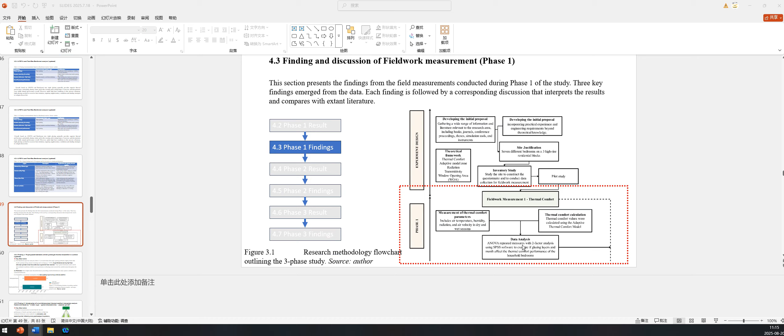From my findings, it shows some... exhibits the prolonged summer discomfort in summer. It shows the different discomfort - in summer, too much heat in summer.

Okay, okay, all right, okay. So this is okay, all right.

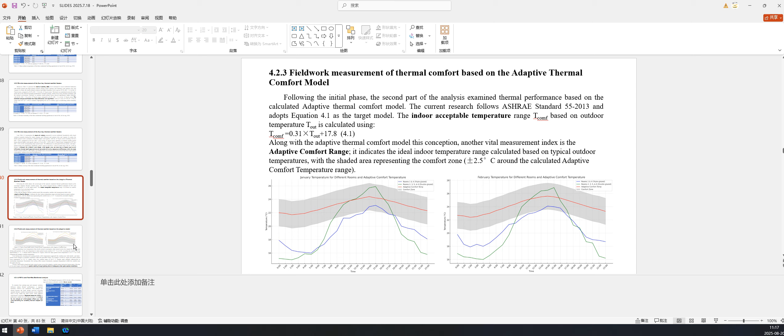Yeah, I have a graph, previously. So okay, all right, so what about just now? What is the difference between just now and this one? This one I want to highlight the discomfort and overheating, the time duration, exceeding the period and the time.

Can you show it in the same graph? The next one, the other graph... the other one. You mean this one? Yeah.

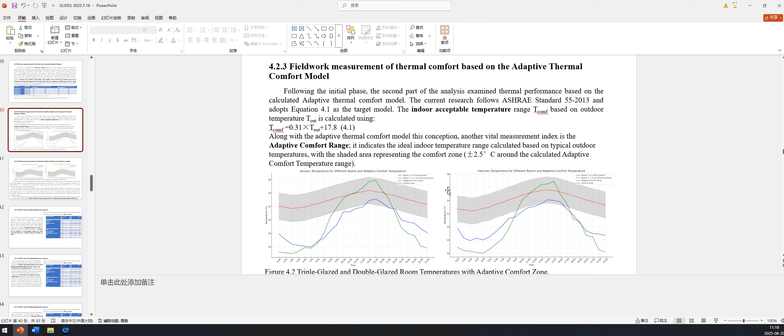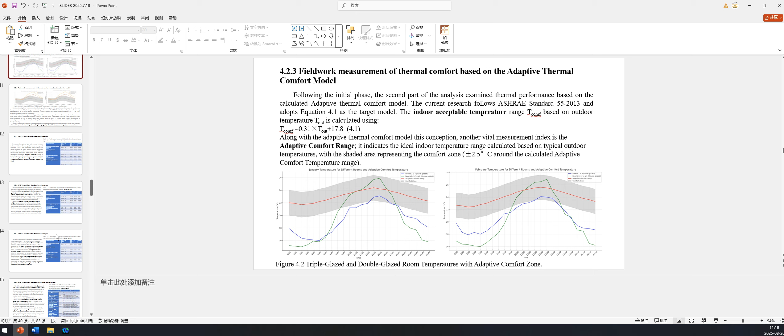Okay, if you show this one, I think this is enough. But it's okay, I understand you want to show the other one, but I'm not sure what kind of chart that is. It's not clear - the y-axis is something wrong.

No, it just shows two types of room. Maybe, yes, maybe. Because here it shows that all the time triple glazing will be higher than the double glazing, isn't it? The y-axis is two types of the glazing, not the temperature actually. I mean two types of the glazing.

So it's not clear, you see. If you compare it, it cannot be not temperature - it has to be some results, you see. What do you mean? When you put this together, you get an hourly chart here. So on the y-axis, there must be something you are counting, right? Do you get what I'm trying to say? So now I feel that it's not correct.

I mean, if you want to show this, probably the best way is to put two graphs together - the triple glazing and whatever is on the y-axis. But if you're just showing the hours, how best to show that? Because if you put this together, that means you are comparing. So what is to compare is actually the temperature.

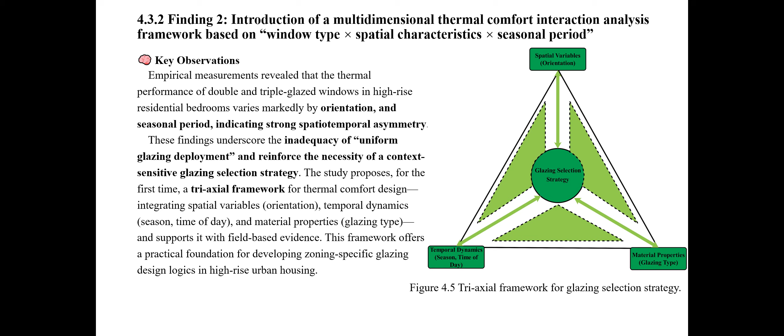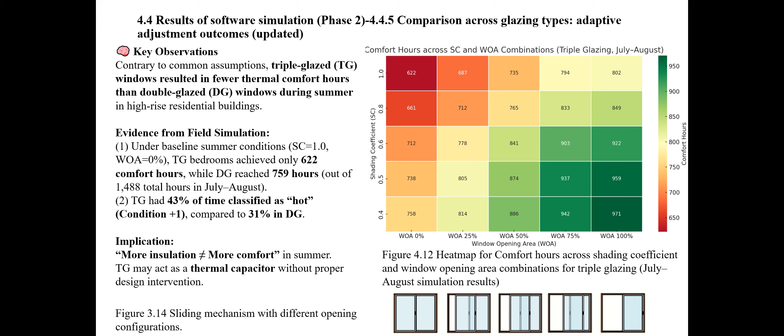This chart shows when it's red it indicates discomfort, when it's green it shows most comfort. Okay, continue.

Another graph shown here compares the comfort hours and condition changes for different glazing types. This blue chart is a baseline comfort hours when SC is 1 and WOA is 0%, and I improved the condition with SC reduced to 0.4 and WOA increased to 75%. So you can see the three types of glazing.

The comfort hours increased, and the discomfort conditions have dropped. For the triple glazing, when the plus one shows the condition is hot, after the improved condition, the hot percentage dropped from 43% to 9%, and this is the double glazing respectively.

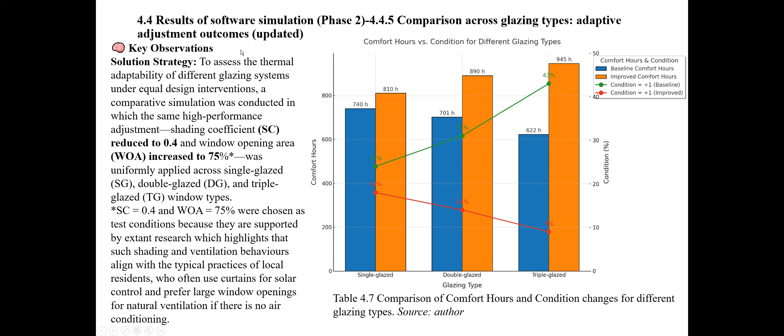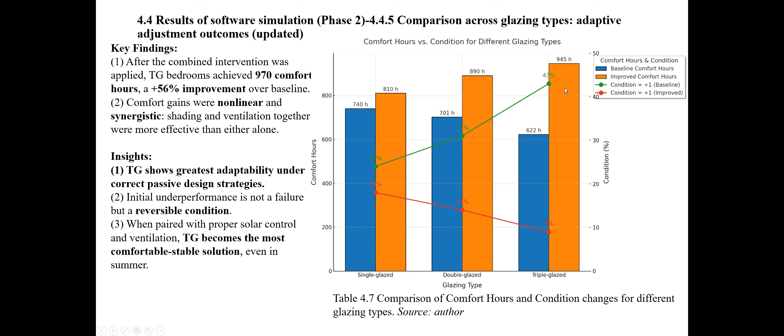So I just wanted to compare the adaptive adjustment outcomes. The finding is triple glazing shows the greatest adaptability under the correct passive design strategy, and the triple glazing is a reversible condition. Comparing the numbers and percentages, I have drawn this conclusion.

This is the phase 2 finding 1: the triple glazing exhibits the highest adaptive recovery potential despite the poorest baseline performance, based on the chart.

Do you have the room condition? Did you share with us in the earlier presentation the room condition? You mean the decoration? It means the orientation, which floor, the location.

Okay, because when you mention all that, where is it located at? Which room are you referring to? And you have 2 layers room, 3 layers room - what does that mean?

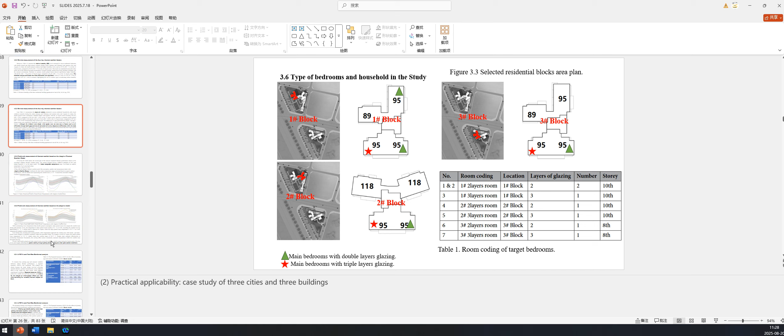Okay. Because it's very important, Chenyu, when you want to - sometimes your data, there are many data.

How are you going to simplify so that people can understand your work? Like when you sit here, there's a simple single glazing, double glazing, triple glazing. Or which data are you referring to?

When you said improvement of the comfort hours, right? Because at the end of the day, you have a few cases. You have a few conditions just now, right? So we need to see which one you are focusing on.

Okay. So I just added some graphs to these findings, and I compare the adjustment to the simulation, and in the end I just compare the...

Nine findings. Can you make it into full screen? I cannot see. Okay, sorry. It's okay, quite small.

Okay, better. Okay, so I just compare the nine research findings of the whole research. So every phase I have three findings. So I just want to put it together.

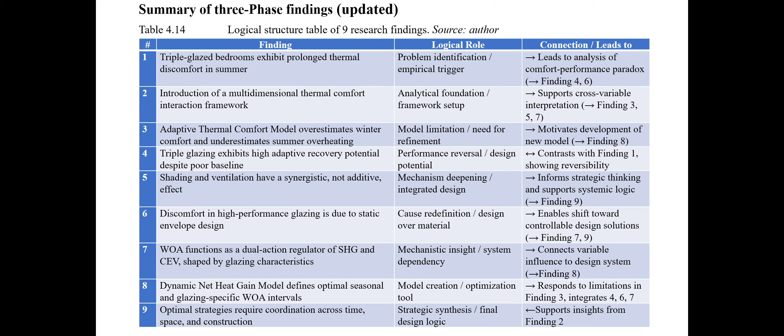From when you get all your results from the nine tables, what you have to do is look back at your model, your conceptual framework. Can you bring us back to your conceptual framework?

So what is it that you're going to prove, and have you managed to actually fulfill your target?

Okay, can you make it big? Okay, double glazing properties, triple glazing properties, window opening area. Okay, so now you are trying to prove that your window opening area will improve the thermal performance of this double glazing, triple glazing.

Okay, so in the window opening area, there are two components that you're looking at, which is the solar heat gain, cooling effects of ventilation, as well as shading coefficient. Okay, so moderating variable - you identify that as a catalyst, the one that helps a lot in terms of your reading.

Okay, so now I want to see that process, just now from the one that you have presented - how does that actually prove this relationship that is happening? Can you share?

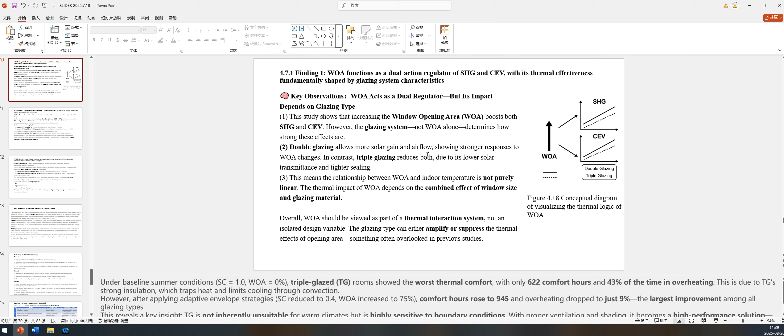Okay, so what is it that, because in your PhD there is the part where we talk about novelty of research. Novelty of research, it's like out of all your findings, we want to know what are the most significant findings from your research. Can you be able to explain that?

So I just summarize the novelty of the work. So from the last phase, I just established the WOA as a dual functional interface affecting both SHG and CEV.

So from the first phase, I just found the triple glazing has a problem. The problem issue is it has more discomfort hours during the summer afternoon, but when we adjust the WOA, when we adjust the opening area of the window, when we adjust the shading, when we change the area, it can...

Can you just a moment? Just a moment. Yeah, okay, okay.

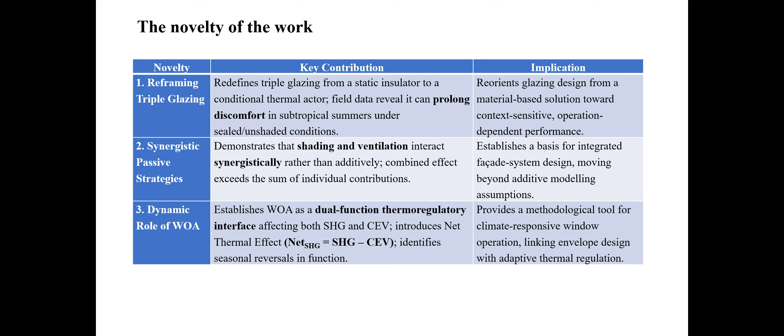Right, continue. Can you continue? So yeah, that's my note.

Actually, I just revised the above context. That's all about my revised context. I have no more to present.

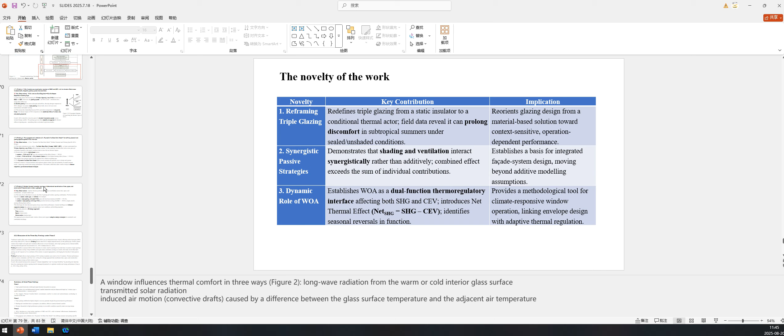Okay, so the most important thing is for you to look back at your objectives. Can you go back to your objectives? Yes.

Okay, can you make it bigger? Where's the objective? This is research question, is it?

Okay. Yeah. This is my research objective.

To empirically investigate the thermal comfort performance of different bedrooms with double or triple glazing windows in the selected high-rise residential building. Okay, I think that is kind of clear, but to me, the way that you show your readings has to be clear.

Just now when you show, so in this case, how many case studies are you talking about? Because sometimes in one building you might have 3 locations, so you must be able to identify and name them correctly. Just now when you do 95, 95, 95, it's not clear.

So what do you mean by 95? Is it the number of the unit? Is it location 1, location 2, location 3? So you must be clear on this matter, Chen Yu, because you must understand, panel don't have time.

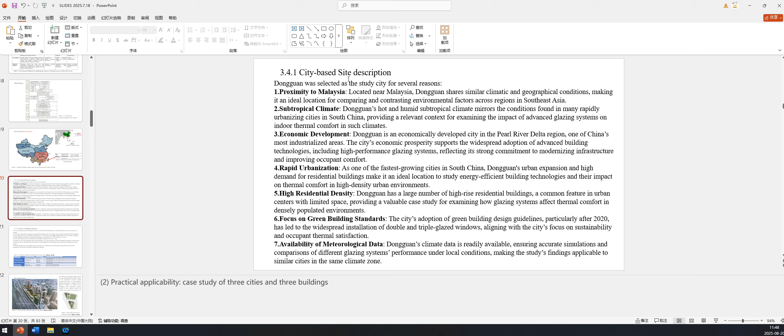It has to be written in your method - the criteria. Yeah, I just select the scope from the large to the small. I just select the city, then I jump to the site, and this is the criteria for the building selection.

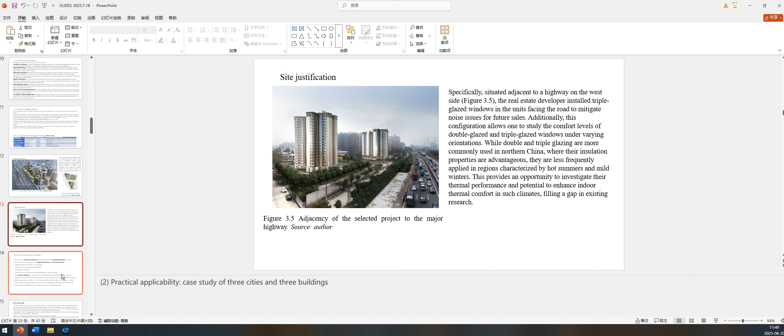Before you go to the criteria, you must also see your sampling size, so you be able - because of course sometimes you have many thousands of buildings of high-rise in China, at least you have that data, how many buildings you have. And then this one you have to be smart, so when you talk about sampling - because this is actually a quantitative study.

Although it is a quantitative study, it is actually simulation based. So when it's simulation based, you can decide on the numbers of how we say that it is enough to compare. We cannot be giving numbers, then later on we feel it's not enough - the panel will be able to say, no, you are not comparing apple to apple. So that one you must be very careful.

So when you say that you are using purposive sampling, what is the difference between purposive sampling and other samplings? Purposive sampling - when it comes to that, namely when I have a specific purpose before we conduct, we select the rooms.

Because for example, we have different glazing types. We already know we want to compare the double and the triple glazing. We already do a survey. We know the room layouts for the comparison, and we know the facades or orientations about all the rooms.

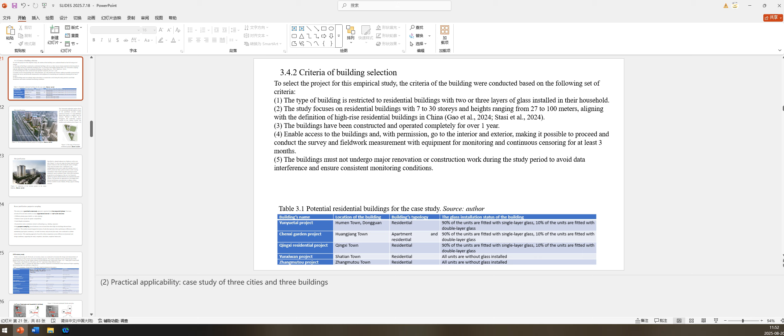After you have done criteria, can you go to the next one? Research - this is method, is it? Yes. Okay, site justification, some more.

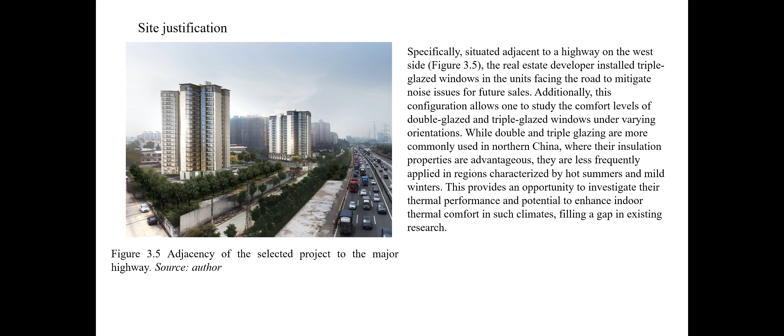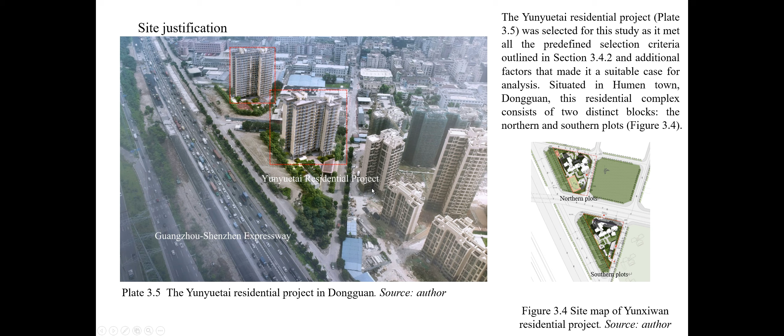So when you talk about five, is it from two different buildings? Yeah, they are totally different buildings located in a different area - located in, but they are in the same city. So I just select the city, and then I select five different projects. Then based on the criteria, I just select one.

This is the logic of my selection. To me it's okay because at the end of the day you are comparing the five, right? You are not just doing one, correct?

Or how do you go about one building with seven bedrooms? Yes, when you talk about the seven bedrooms, you have a combination of triple glazing and double glazing. Out of the seven, maybe two are using double glazing, three are using something else. How do you go about the combination of triple and double glazing?

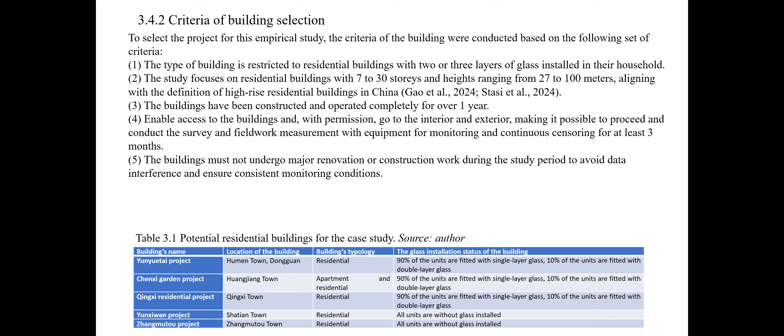You can see the legend. The red one shows the triple glazing there - 1, 2, 3. There's 3 bedrooms using triple glazing, and 1, 2, 3, 4 - that's 4 bedrooms with double glazing. Because they're opposite to the street, they want to mitigate the noise, so they installed triple glazing for the noise.

Okay, now I can see layers of glazing number two, but I cannot see - this is where I'm saying, Chen Yu, this page here is not clear. For example, you have layer of glazing, 2, 3, 2, 3, 2, 3, and then you have a number, one block. One block is like that, and then I have 2 layers room. What do you mean by 2 layers room? Is it 2 layer glazing, 3 layer? So it's not clear actually.

So if I look at number 1 block, 2 layers room, 3 layers room - means room number one with 2 layers glazing, is it? Number 2, this two is with double glazing. This one is with triple glazing. There's three bedrooms - this is triple glazing. It's confusing. Do you agree with me, Chen Yu?

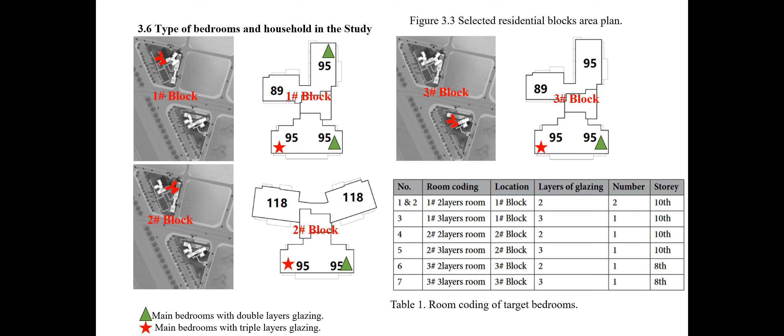What is this configuration? Control variable.

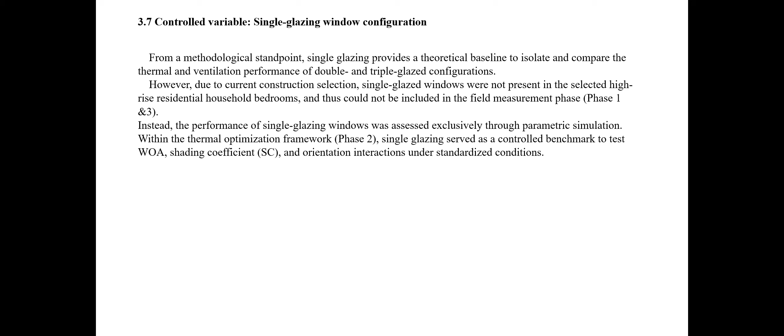Dr. Chris, we were just going through the results just now. To me, I think he has done the analysis, it's done, it's just the way that he puts his work - maybe we are reading this through slide. There are a few important things that at the end of the day we want to see if it answers the objective. Just now we were looking at objective number 1, because objective number 1 is actually to show an empirical study of the differences of both double glazing and triple glazing.

So this is actually going back and looking at the results. Can you make this bigger? So upon doing this, Chen Yu, you're saying this is actually to investigate the thermal comfort for the different bedrooms, right? All the results you got just now, the conformity test that you compared and so on, you can have it in a table form. Can you show me where is the table form for RO number 1?

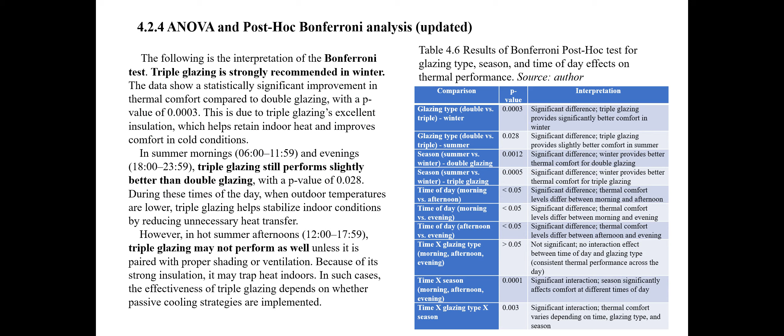Can we get a table to show this analysis? He's shown this is actually analysis - superior thermal, summer, afternoon, depends, overall. This is your additional, is it? Yeah.

Okay, winter, summer. Again, your table, your description. This can be - this is actually already analyzed. Can we have the table of means that you have?

How many days did you conduct this study? For all this winter, summer, how many days? You took from morning to 4. 4 days - 4 months, about 4 months. Okay, right, because I'm seeing this in batches.

Probably if I go to your thesis it will look a bit clearer. But the thesis, the one you sent revised on 7 August, is already the updated one, right? Yeah. So this means you have already put the results of the Bonferroni test here.

I just added this context recently. Last time you said we should get a result for which type of glazing is the best, so I just put the recommended glazing types here. So have you put it in your thesis? Not yet - yes, I have put it in the thesis.

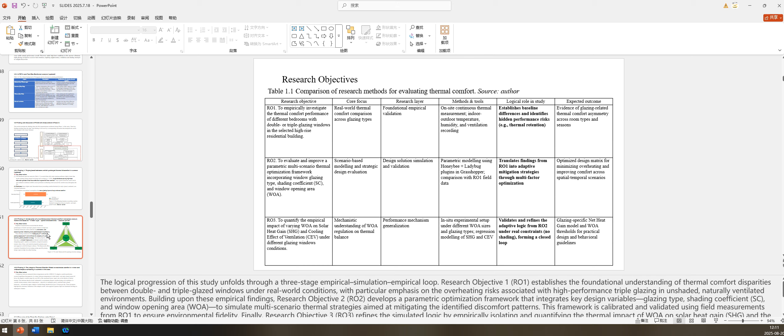So basically, this one you did a simulation, right, using the parametric model, and you compare it with your measurement. Yes. Okay, so do you see the relationship from your conceptual framework?

Is it from objective number 1 or objective number 2? Where do you actually expedite on that? You mean the conceptual framework? Because this is when you test the relationship, right?

Yeah, I tested the WOA, the moderator, effect on the thermal performance. So you tested it. Okay, so tell us how it is done, and then what is your result?

So I just adjusted the WOA and SC and compared the previous baseline condition with the improved conditions. The baseline condition is when SC equals 1 and WOA is 0, meaning fully closed, and triple glazing only achieves 622 comfort hours.

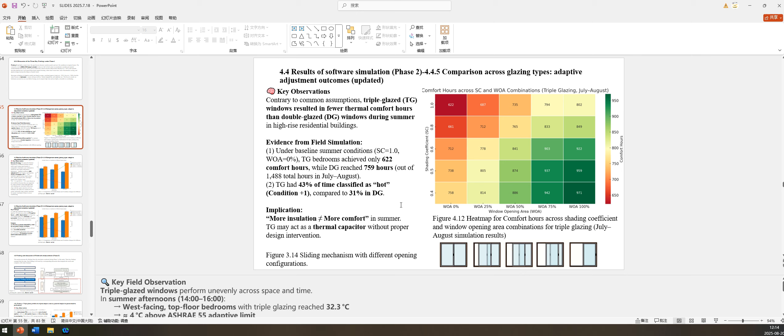Can you show us from your data? Can you also show the data being simulated, your Rhino? Can you show us your parametric model? You mean this? Yes, can you explain a bit?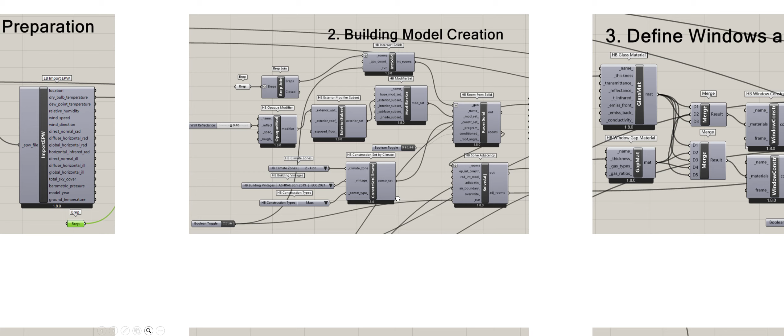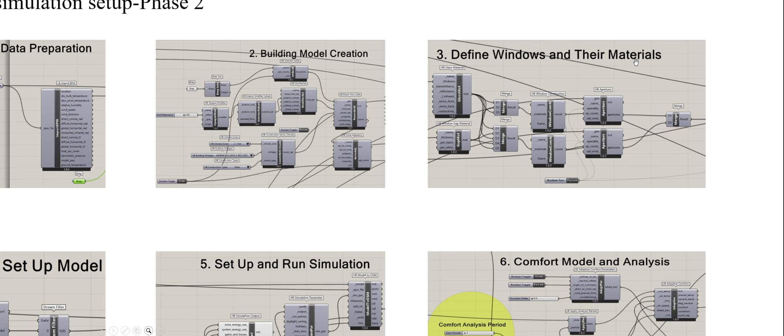The first one is the environmental data preparation. So I select different environmental data from the specific city, and then I build the building model creation with different components of the simulation software, and then I define the windows and their materials.

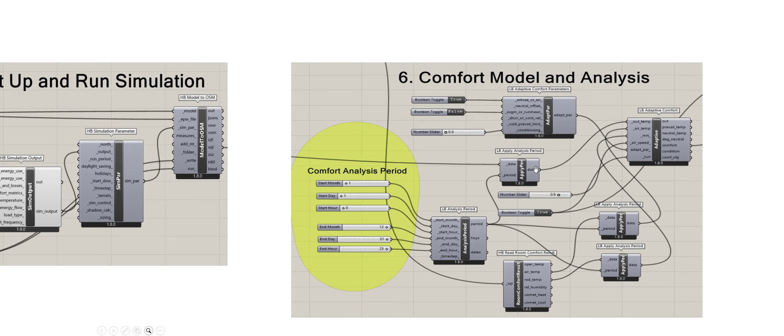And then I built and set up the model for the different comparisons, and then I set up the model and ran the simulation. So this is my comfort model and analysis of the whole simulation.

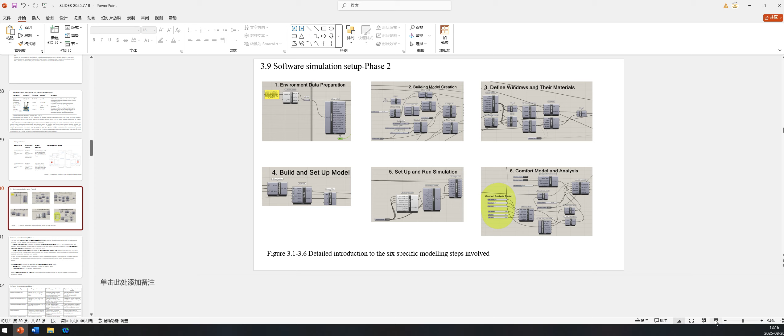Okay Chanyu, this one needs to be written in your method, but don't overdo it on the technicalities of the write-up. It has to be step-by-step. I think this is quite simple to understand, but it needs a write-up. So I should be seeing this in your thesis, right? Yeah.

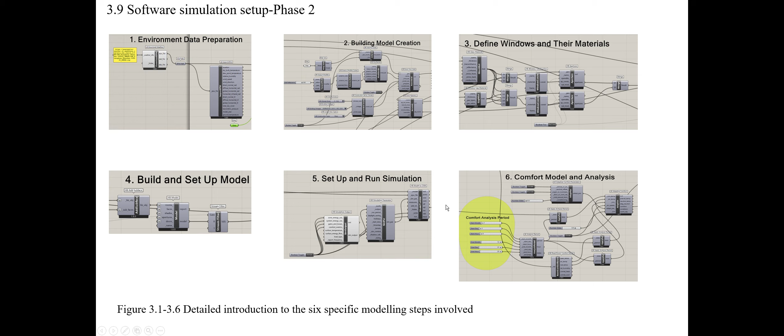Okay, so the result that you have simulated from here, now you compare. Did you compare with your current result that you have now? So how is the data analyzed? What is the result from the data set that you compare? Is it reliable, the data?

Did you check on the normality test and all that? Did you do that? Data is okay before you come to this. Yes, I conducted the normality test for the thermal comfort data

Before I did the measurement. Okay, before you run ANOVA, is it? Can you go down? Okay, right. Okay, continue. So from here, then you identify the relationship, right?

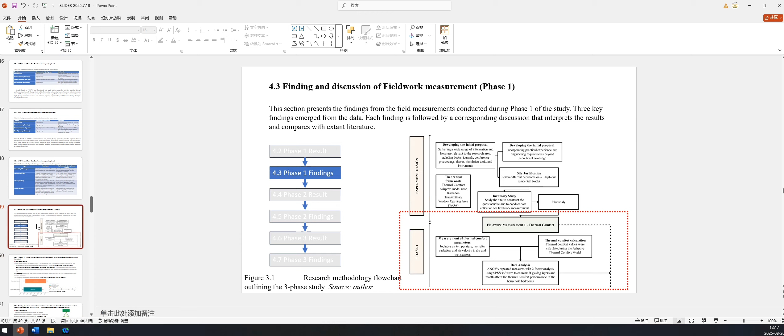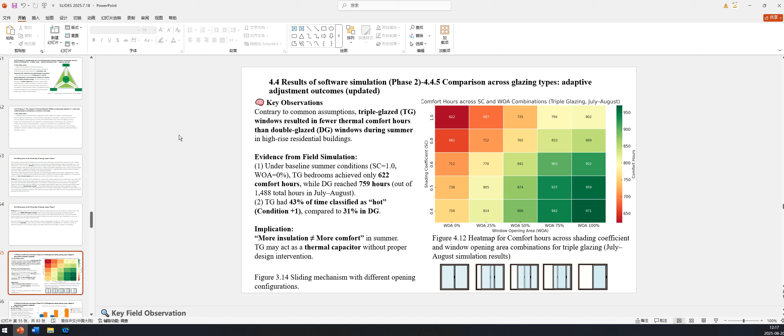So then what did you get from objective number 2? Can you explain a bit? Okay, this is the result.

Then I jump to the findings. So the finding, I found the triple glazing exhibits highest adaptive recovery potential despite the poorest baseline performance.

I want to highlight the recovery potential when we adjust the parameters, the triple glazing becomes the best because of the best configuration of the glazing, so it has a recovery potential, highest adaptive potential, and then I just compare the two moderating variables about shading and ventilation.

But I just want to analyze these two variables, what kind of relationship it has between them. So I just compare the number of the data before and after the adjustment.

So I say here, if only WOA and only the shading - first of all I tested these two variables one by one, but then I put it together and I achieved the most comfort hours, the best results.

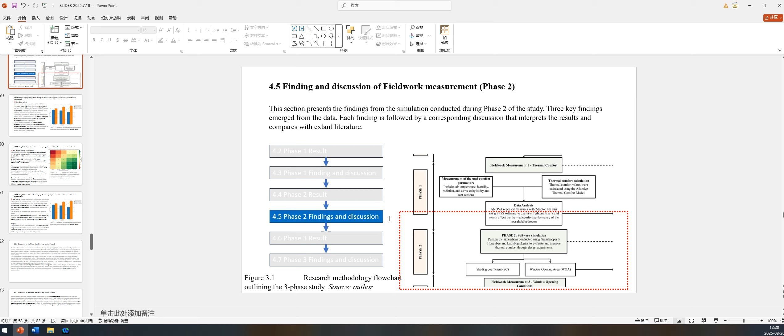Okay, can we look at objective number 3, Chen Yu? Okay.

To quantify the empirical impact of varying WOA on solar heat gain and cooling effect under different glazing windows. In situ experiment under individual WOA size. Okay, all right, this one. Okay, the second one I can understand.

You are looking at both the empirical study and the simulated results, and then you try to map on the relationship of this moderator. Okay, but the third one, you should be able to identify, okay, what is the result under different WOA sizes and glazing type, okay. You also said here there's a regression model of SHG and CEV.

So where is it? Because this one is the result that gives you the novelty of the study. So when you said the WOA size, okay, what is the most effective WOA size if you are going to use a triple glazing or a double glazing? What is the best combination in order for you to achieve good thermal performance? So were you able to actually spell that out until the end? The WOA size, what type of glazing, basically what is the combination of that?

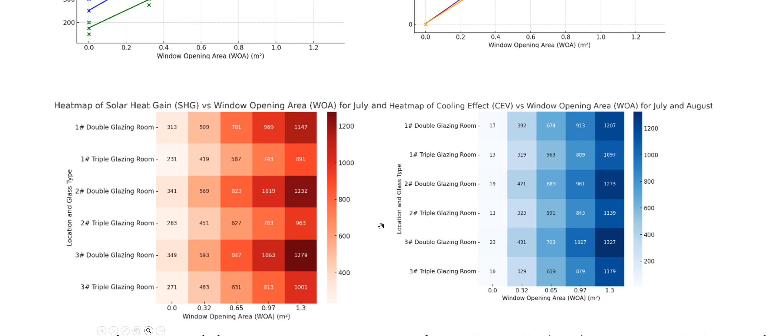This one is your result, right? What about the scholars? Scholars meaning previous citations, other studies that are related to your area of research. You mean the discussion comparing with other research? Compare, because I want to see your findings. Yeah.

Dr. Chris, please add on. I'm not sure entirely, but I think, yeah, that's the way forward. Yep.

Do you understand what I'm asking you? Can you? Sorry, okay, you have shown your result just now, which is also fair to see the table just now that you showed the color ranges and so on.

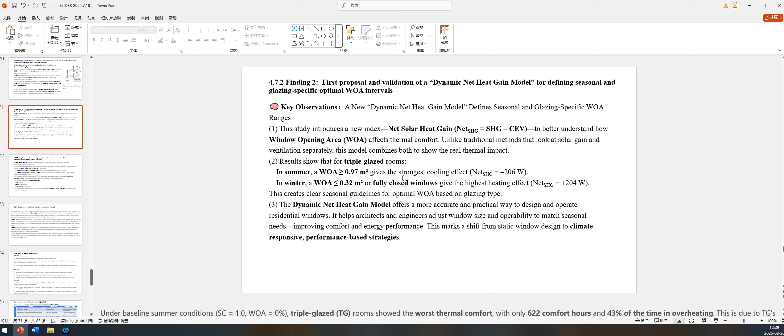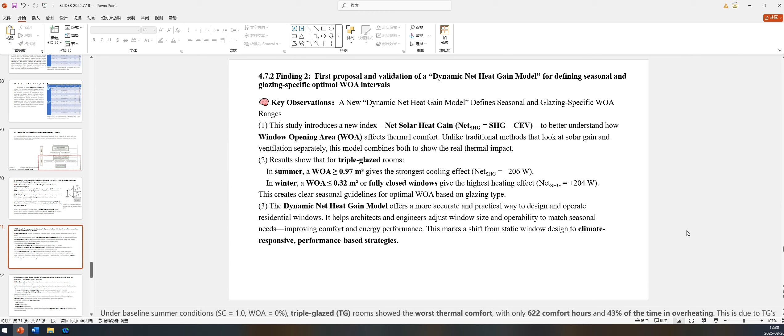So when you said 0.97, just now you have 5. How many scale did you use to look at the window opening area? Is it 5? Yes, 1, 2, 3, 5. Yes, 5 scale. Okay, all right. So when you say 0.97, it is actually somewhere here, right? In between, before 1. Okay, so that means if you're saying that 1...

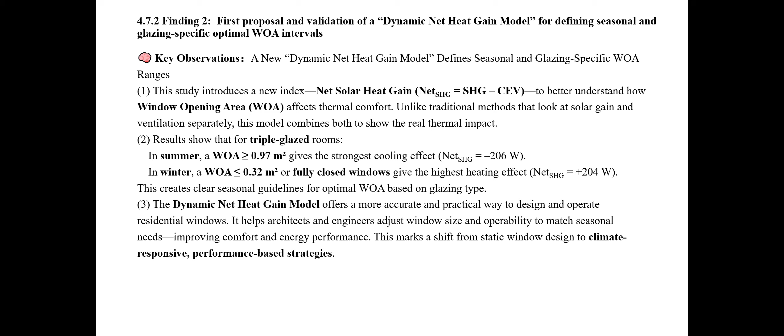I don't know, I feel that is missing. Okay, did you do any literature study in terms of your findings? Yes. Alam itu, yes. Yeah, I did.

Okay, right. So traditional research often isolates variables like insolation and ventilation, treating open area as an independent level in the indoor thermal conditions. But from the existing knowledge, there are no specific numbers of the open area. They haven't done this study before.

You're saying that there's no study that is based on window opening area? No, they haven't given a specific opening area. I mean, about one square meter is good, or 3 square meter is good. I haven't found that research result. Open area, some research have done that, but the specific number is missing. So this is the novelty of this research.